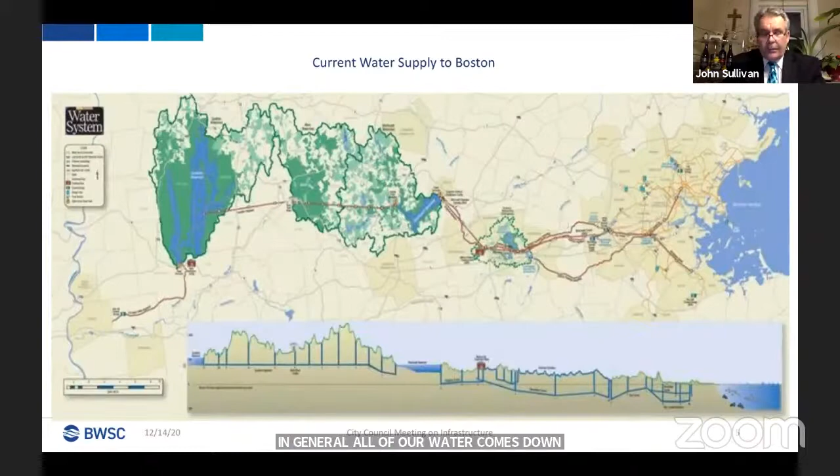It is run by the MWRA, the Massachusetts Water Resources Authority. The question about consumption, with all the new building, can we handle it?

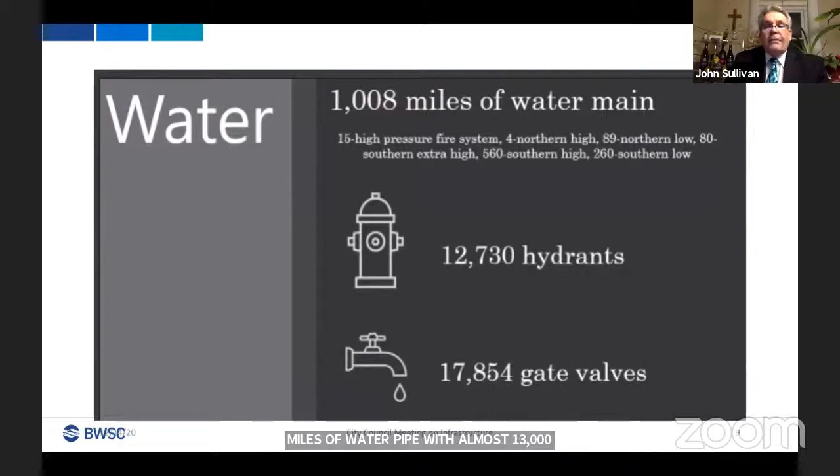The age of the water mains, everyone talks about how old they are. Well, we do have some old water mains, and you can see we still operate them. The oldest one is 1848. It's under the Boston Common. It was the original pipe put in when they had the great celebration when they first introduced public water to the city of Boston. That's in there and it's in great shape.

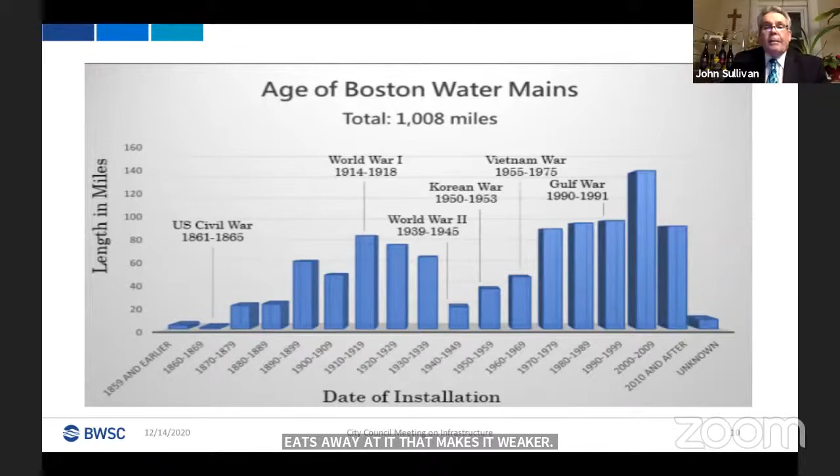Just because a water main is old doesn't mean it isn't useful. The problem we have with water mains is corrosion, not age. It's the corrosion that works on the wall thickness, slowly eating away at it, that makes it weaker. And that's the big key. So just because we have old pipes, that doesn't mean anything as far as the operation of them. We just put the wars on so everybody can see when they were installed. We had pipes before the Civil War.

Now, the good news and bad news is in other cities, since they have so many breaks, it's old news - nobody ever sees it on the news. With us, one good water break, that's all the news people want to do, get down and take a look at this water main break. But this shows that our system is solid. We're in very good shape, with a very good structural system of pipes delivering water to all of our neighborhoods.

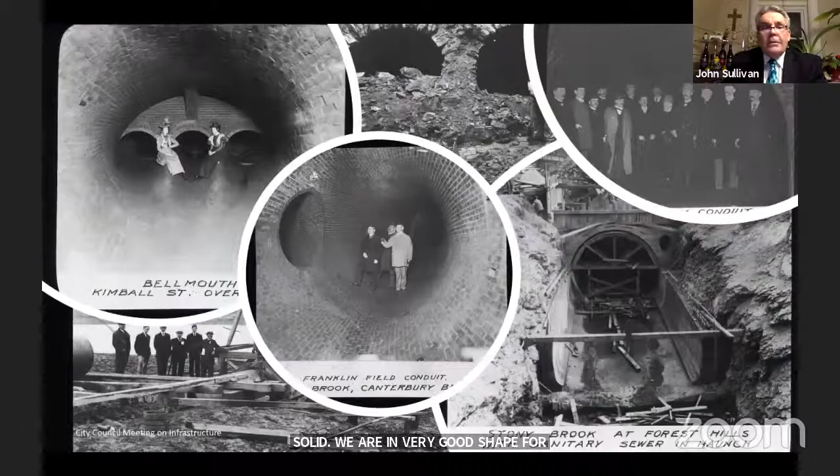The sewer system was the pride of the day. We used to just run the sewage and drainage right into the harbor, all along the harbor. That's why no one wanted to live along the waterfronts - you would just flush and down it would go. When they started in 1878 building the brand new system of pumping sewage, we simply pumped it over to Moon Island and then let it go out with the outgoing tides. It was the civic pride. Everyone thought it was important. It was the best thing going.

And here are some pictures of people celebrating the fact that the best brick masons in the world aren't showing their work in our cathedrals, etc. - they're in our sewers. The sanitary and stormwater system is over 1,500 miles of wastewater.

There's a bunch of catch basins, and you can see all that data. A lot of things that we need to work on.

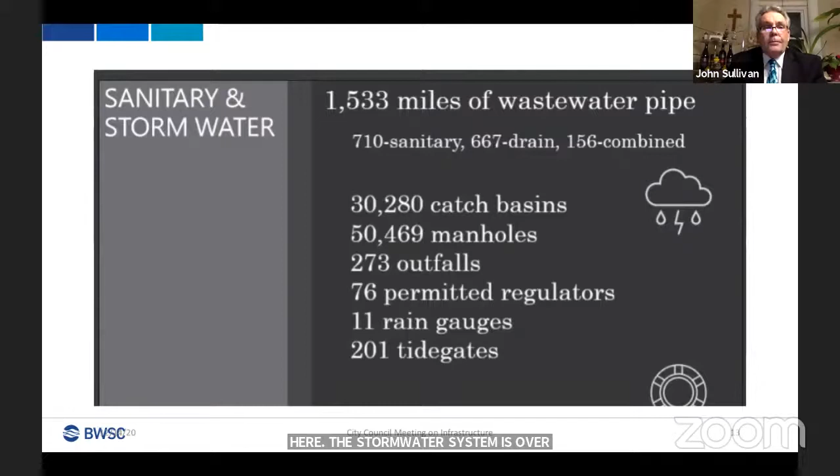The age of the system, again, we just show you how old it is. Just because a pipe is old, if it's sitting in the ground and it's surrounded by clay and not disturbed, it can last for a very long time, especially our brick infrastructure. In Europe, those things go back 600, 700, 800 years.

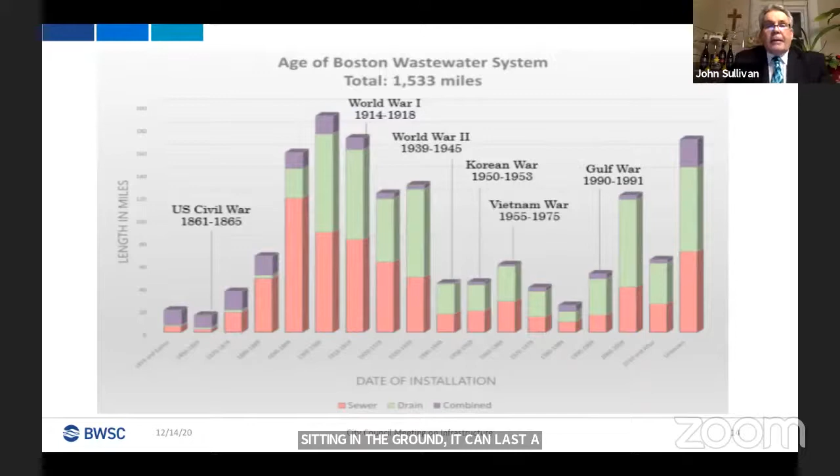Our major projects in the commission for our capital are water main replacement, sewer and drain. We also separate a lot of sewers. We have combined sewers that are designed to take sewage and stormwater in the same pipe. The problem is when it rains real hard, they overflow into the harbor. So we've been doing a lot of work over the past 20, 30 years separating these things out.

We have active sewer separation in Roxbury, active ones in East Boston. We're running around taking out illegal connections where the house sewers are illegally connected to drain lines. We walk around taking those out.

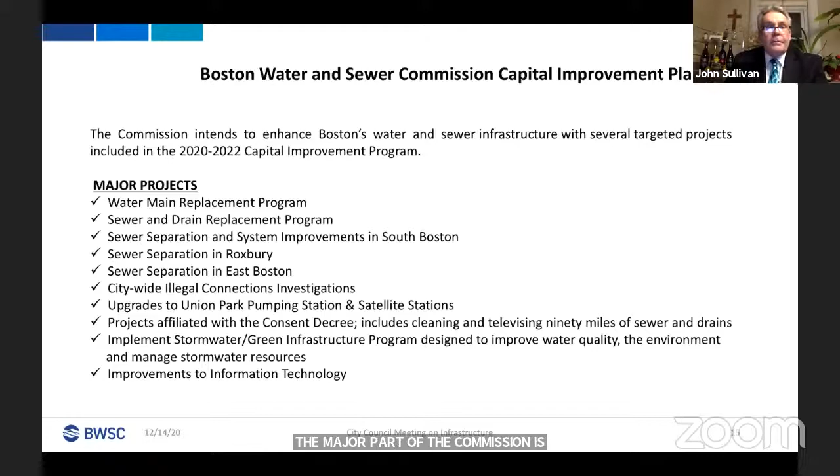We have major preventive maintenance programs, and this is the key to running any system. The last thing you want to do is let something wear out, and so you have to put a brand new one in. You always want to be working on the pipes.

You always want to be cleaning them, flushing them, making sure they work fine. And if there is a defect, you want to be able to get in there and fix the one little defect so the whole system doesn't fail.

So we flush all our water mains. We're out there looking for leaks all the time, because if you can catch a leak before it gets too big, you can prevent a break.

We inspect the inside of all of our sewer and sanitary lines. We do about 90 miles of sewer a year, at least, as a minimum. At the end of 10 years, we will have looked inside every single pipe, and we will know the condition of them.

We maintain rain gauges throughout the city because of climate change. It is changing. We have a system where we can check water in 5-minute increments. We are the only city we know of that checks it in 5-minute increments. Everyone else is in 15 minutes.

And we inspect our manholes looking for potential problems.

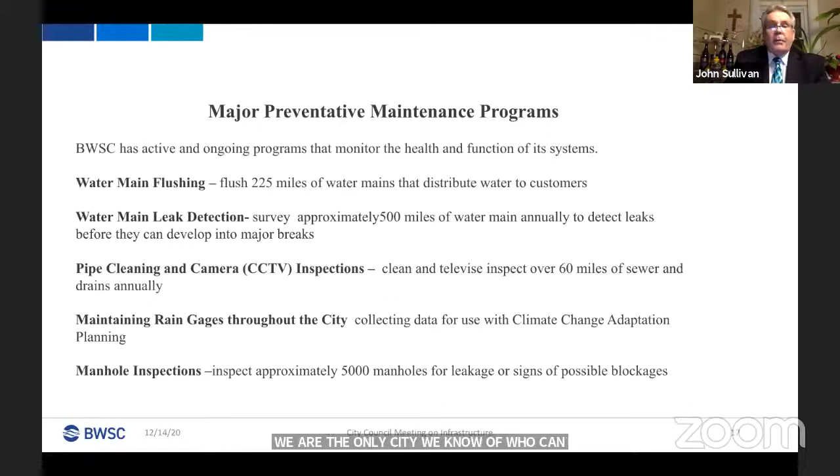The issue of private sewers and private alleys came up. As far as we know, the best we can get from our records is there's just shy of 6 miles of sanitary sewers in private alleys that serve multiple connections, multiple homes. They are all over the city. There's not just one place in the city that has them. Even in West Roxbury, we have a bunch of septic systems and some of these private sewers up in that area.

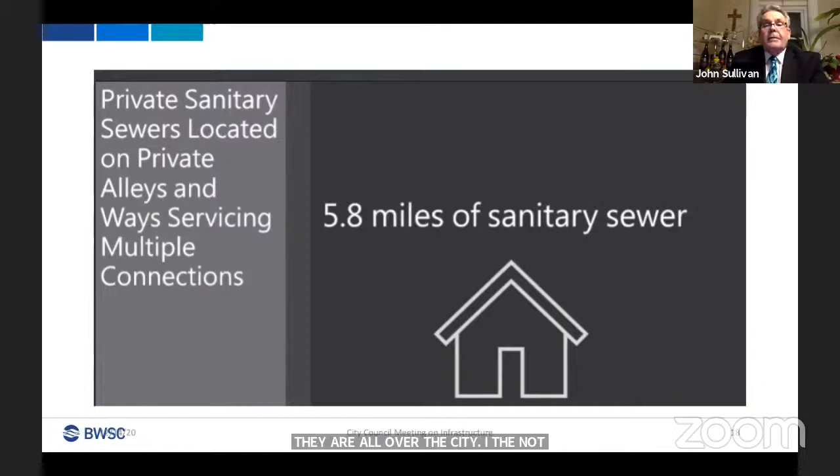The commission, to deal with that, passed a betterment assessment charge. Through our policy, you can apply to us, and we will do a study to figure out what it would take to put in a brand new pipe. We offer 25%, we will pay for it. And then we have the homeowners pay the remaining 75% of the cost of putting in the sewer.

But from that time on, we own the sewer. Believe it or not, all the sewers, or most of the sewers in the city of Boston, this is how we extended them. We had this policy. It's an old city policy. When the commission was formed in '77, there was none at the Boston Water Sewer.

It took us about 20 years when several people approached us to come in on this. So we have a policy. Any of these alleys, if they meet certain criteria, can apply under the betterment system, and we can extend the sewer system, and we will own it from then on.

The Boston Groundwater Trust, we work with them very closely, monitoring the wells. A lot of times you'll have problems. And why would we get involved?

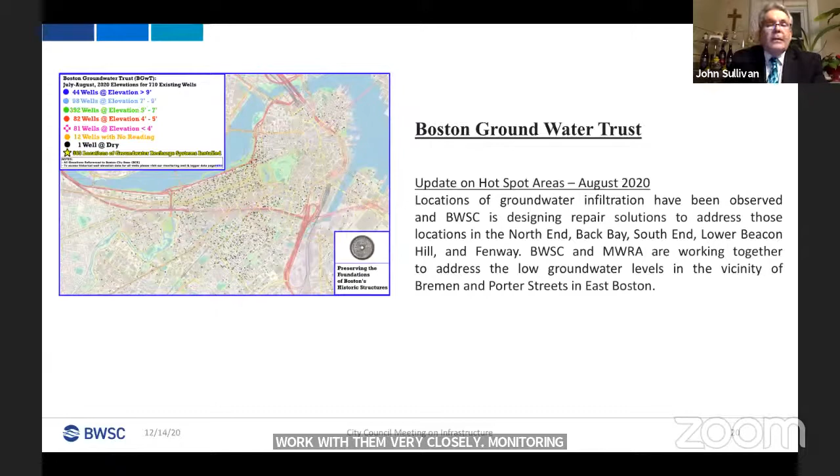What's interesting about it is there's the picture again of the Back Bay filled area. Any place here, if the groundwater is leaking into a tunnel or into sewers, it doesn't have to be just the Boston Water Sewer infrastructure. The pipes leading from your building, your home, to the middle of the street are owned by the homeowner.

Many of those pipes are in tough shape. They can actually deplete groundwater. So when we find an area that's got depressed groundwater, we go out and work to determine where the problem is, and it may be our problem or it may be a homeowner's problem.

I do point out that as part of our enabling legislation, it actually says we are not required to maintain groundwater levels. However, we know it's very important for the vibrancy of this city that we keep the groundwater high and keep all the systems working well. Depressed groundwater can also cause some of our pipes to settle.

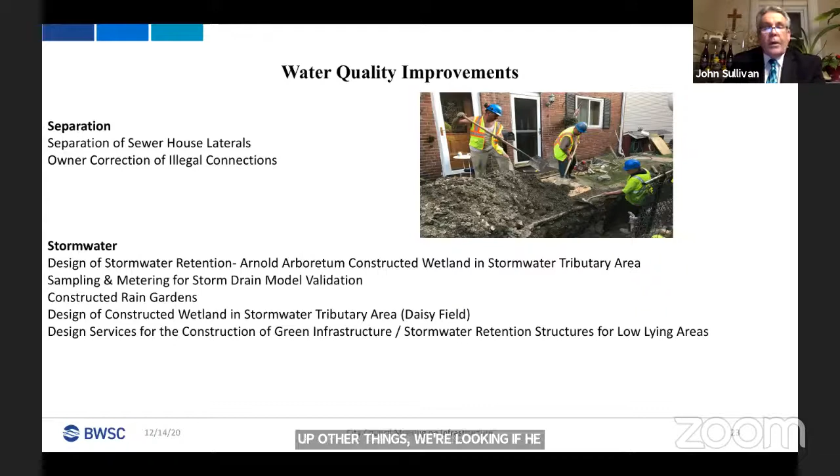We are always doing water quality improvements to the harbor, addressing illegal connections, and the separation of house laterals. We're bringing up some other things in the Arnold Arboretum, looking to build some constructed wetlands, and we build rain gardens. Green infrastructure was brought up, which we can go into further in questions. But this is just some of the things we're touching on with stormwater.

We have a lead replacement program. This is to help remove lead from the front yards of homes. We've been doing this for many years and enhanced it in 2016. The grant is now a $2,000 grant.

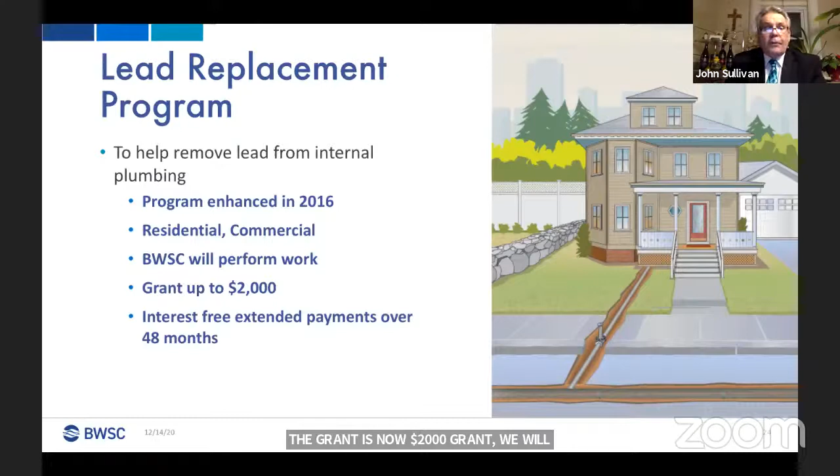We will go in, we will replace it. The first $2,000 is forgiven. You can pay us directly for the rest of it, or you can have an interest-free payment over 48 months.

Leak up to the owner - we will go in if there's a leak in the front lawn and you can't get your own contractor. We will go in there, perform the work, and give them interest-free payments over 24 months. And finally, the sewer lateral assistance program.

As shown in this diagram in red, that's the lateral coming from your house out to the main street. Most people don't know they own it. They generally find out they own it when the sewage backs up in the house and we go try to help them out. So many times it costs upwards of $8,000 or $9,000.

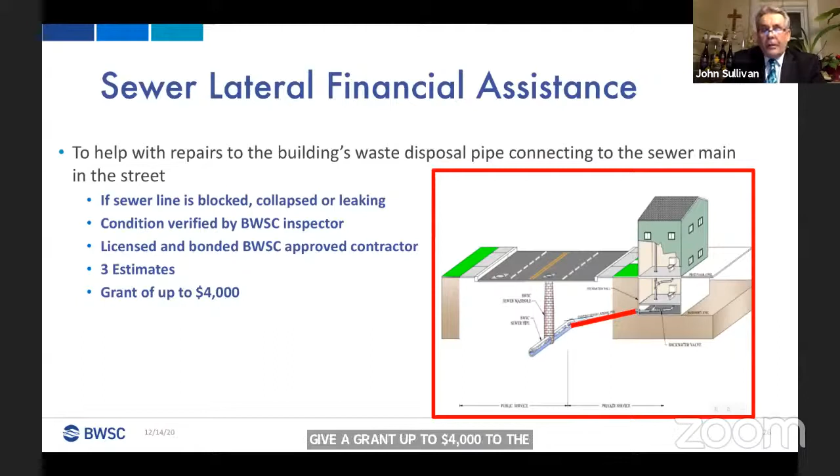Now, we do have a website. Those places we know we have lead lines, you can go on the website and we can tell you whether you have one. If you don't know, if you're confused, give us a call. We will come out to your house and take a look at it. And that's all I had, Councilor, just to give you a quick overview of what we're up to.

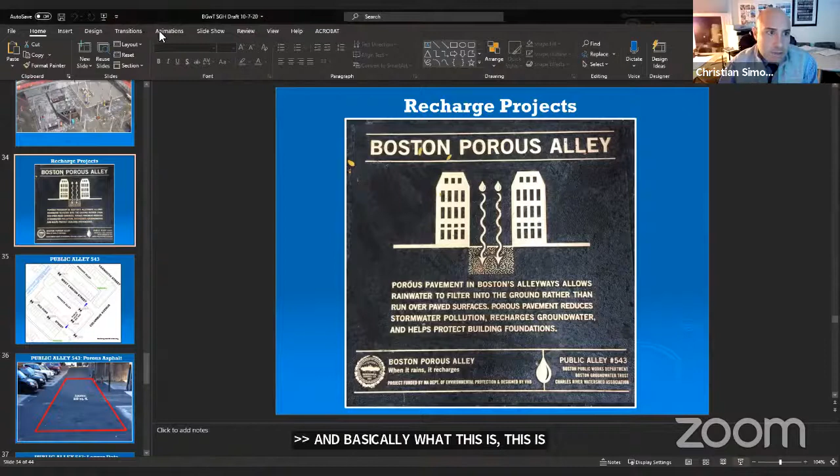Basically what this is, this was a porous alley that was constructed in 2013. What we did was we partnered with the city, and we partnered with Charles River, to install a porous alley in the South End.

You talk about an example as to where we have projects in and what are the results—here's Exhibit A right here. This is a plaque that's on either end of the alley, in the South End in Boston. To give you an idea where it is, it's just off of Columbus Ave, Public Alley 543, between West Canton and Holyoke.

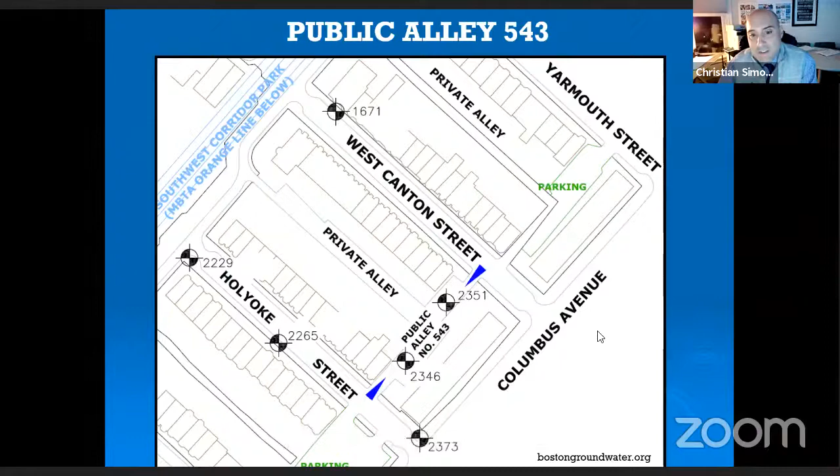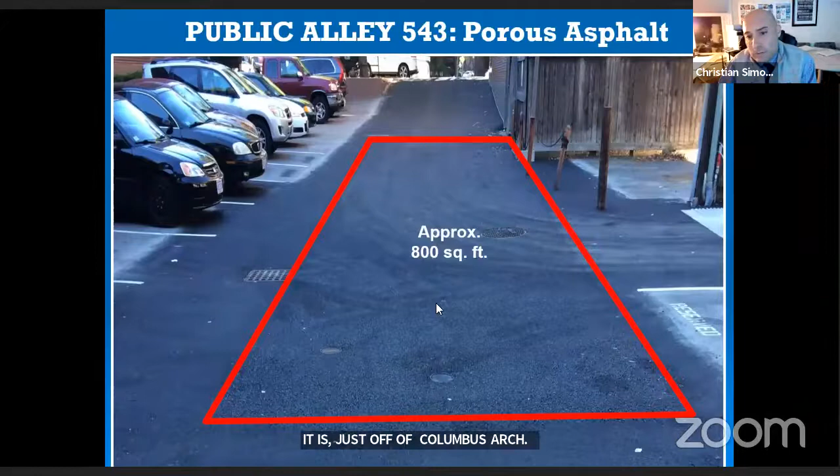What we did was we put two data loggers in there, and we've had them in for almost a decade. What we've seen really is a positive trend in the water table that's held, about a gain of about half a foot in the water table in those two wells, consistent really since the installation.

What this tells us is that the more of these we put in, the more impact we're going to have on water levels. Again, about a half a foot gain in each of those wells. It may not seem like a lot, but for us it's pretty significant, because when we go out and read these wells, you got maybe an inch or two change from the last reading we had maybe six weeks ago, because it's all dependent on what we get for rainfall. That's what feeds the groundwater table.

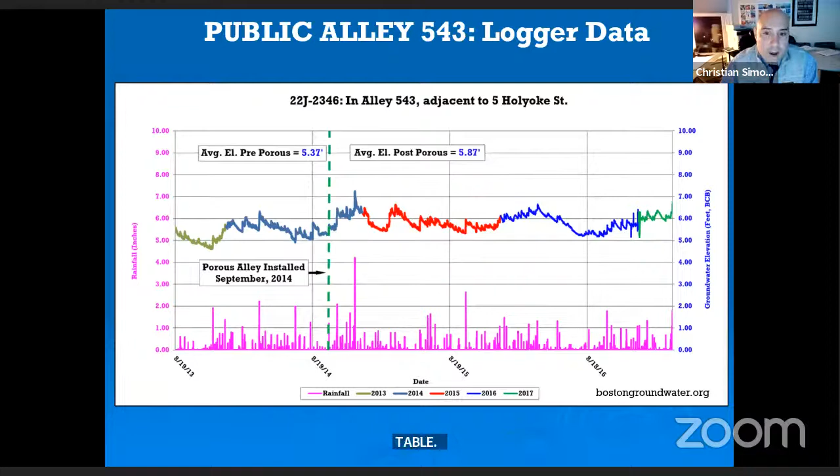So the more of these systems we have in, the more areas we have green infrastructure, water getting into the ground, the better it's going to be for us.

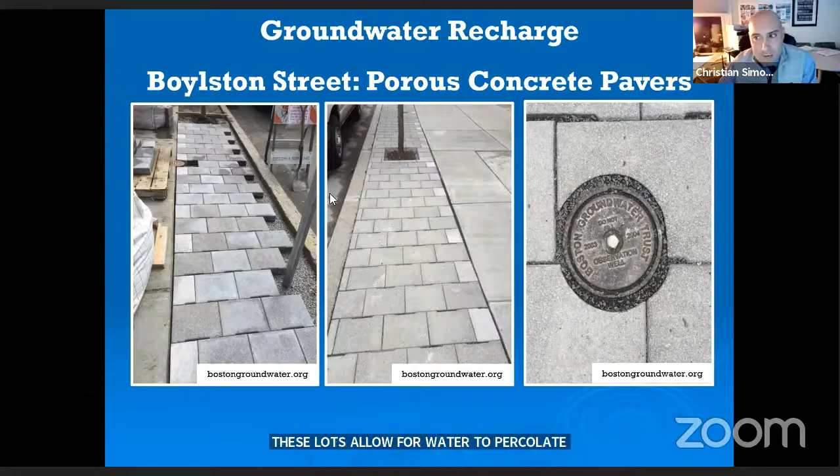Boylston Street, again, this is a city project. They put in porous concrete pavers, along Boylston Street, just across from the public library. It'd be wonderful if we could get more of these in as well. Again, these little slots allow for the water to percolate when it rains, so right before it hits the gutter, instead of cascading off into the street, it goes back into the ground.

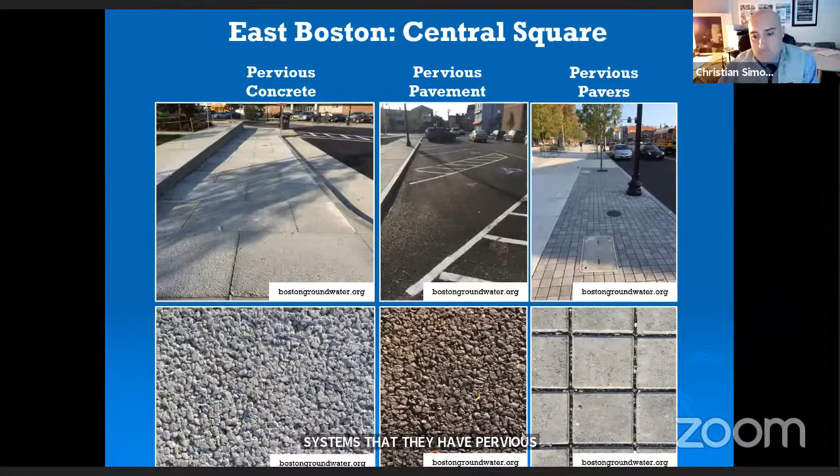We're always happy to have that discussion and talk about potential projects that we could partner in. My board's always asking me, hey, you got any research projects, you're looking at what's out there? Certainly willing to have that conversation and have that discussion.

Thank you, Christian. My final question before we open it up to the public: I know Councilor Flaherty mentioned it, and John mentioned it, and I mentioned it, but still the private sewers and alleys in many parts of the city, including the South End, there's still a lot of confusion about who is responsible for the maintenance. What I'm always concerned about is if there is a major problem during construction and the water pipe breaks, and it's a private sewer, and as we know, a lot of residents might not be home. It might be a four unit condo, or renters, and we don't know exactly how to reach people. The cost of sewer maintenance and repairs are expensive, but the repairs are also critical for the safety and health of our residents and neighbors. So what are we doing proactively? Because eventually there will be a major water pipe break, or a construction related issue that ruptures the pipes, especially in these private alleys. What else can we do to be proactive and try to address the problem now before something major happens?